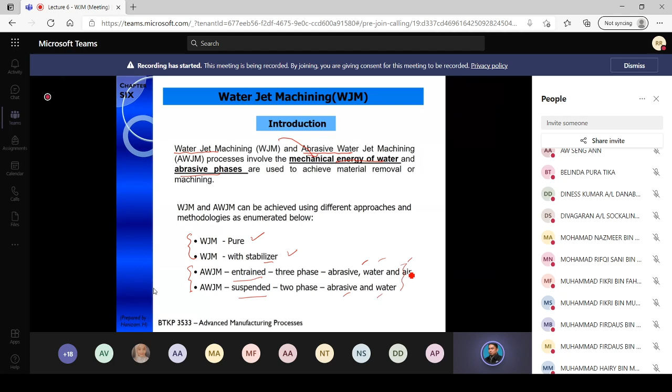Okay, water is pumped at sufficiently high pressure, 200 to 400 megapascal, to produce how much pressure? You pump the water using this 200 to 400 MPa, megapascal, to produce how much pressure of water? Yeah, 1000 bar? 4000 bar. 2 to 4000. Yeah. No, this megapascal converted to bar, 200 is 2000 bar.

So this one is the pumping water, the pressure of the pump. So the water is pumped up to how many psi? 50 to 200 kpsi. Okay, this is the pressure of water. This is the pressure of the pump. Right. So next is the intensifier.

It works on a simple principle of pressure amplification using hydraulic cylinders of different cross sections, meaning from bigger diameter to smaller diameter to much smaller diameter. Okay, water at this pressure, let's say P. When it arrives here, the pressure doubles, 2P. At the narrow one, maybe 3P. Meaning that as the cross section of the cylinder gets smaller, the pressure gets higher.

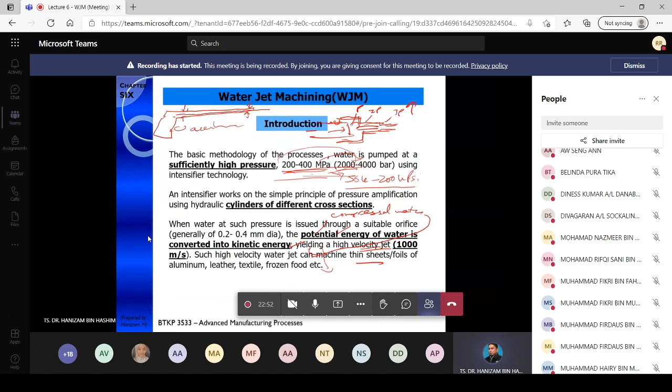Yang abrasive tu, abrasive what? Contoh, there are water jets for machining and there are those used for cleaning also, right? Like high pressure cleaning, car wash and all that, right? So what's the difference? Is it abrasive slower or what? Oh, the pressure is actually low.

Okay, example this one. Can you see this one? Car wash. Water pressure to wash a car. So the PSI is only about 1300 to 1800 PSI only. Just different names for each type of water? Okay, not different names. Actually different pressure. Use different pressure for different purposes. For example, this range of water pressure is for cleaning. This range of pressure, 50,000 to 200,000 psi, is for machining.

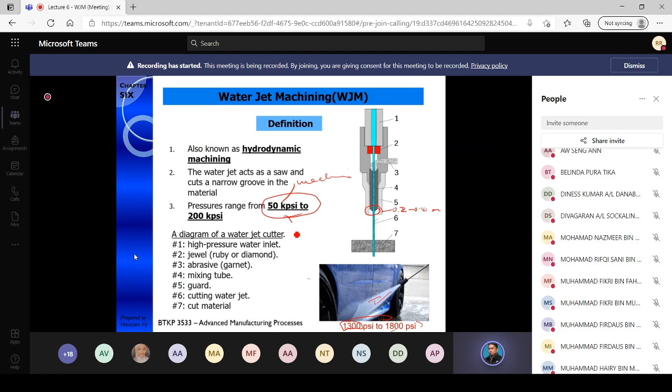Let's say there's another one for, how we call it, I forgot the word. Let's say you want to remove paint, right? You want to remove all this paint from the car body. You can add abrasive also, maybe walnuts, into the water pressure, so that you can add another force instead of just water. Sandblasting? You can also have sand, or you can also have walnut skin.

Sandblasting is slightly different. Sandblasting only involves sand and air. Okay, pasir dan angin saja. But you can still have water sandblasting when you add water. You can remove all the paint from the car body. So instead of 1800, maybe this one goes to 5000 psi. So the pressure of water will determine what type of machining process.

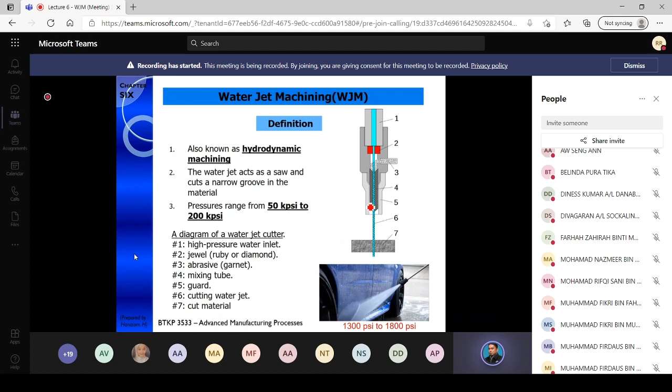Okay, Raja. Yeah. You got it? Okay. Faham. Ada lagi yang lain? Anyone who wants to ask? You can always ask me in Malay, no problem. Okay, if no question, then we proceed lah.

Next one, in pure water jet machining or WJM, commercially pure water is used for the machining process. Only water, tap water or pure water. However, when the high velocity water jet is discharged from the orifice or nozzle, it tends to flare out because of atmospheric pressure. For example, this is the nozzle. When the water comes out, because of the air between your workpiece and the nozzle, there's some resistance from the water to the workpiece.

Flaring out means they tend to kembang, to break up, like your spray. So to solve this problem, people normally add stabilizer. Stabilizer is a fluid containing polymer material. This so-called long chain polymer holds the water straight, not flaring out. When it is straight, you can maintain the pressure of water. So it involves only water, but to maintain the water pressure, you can add stabilizer made of long chain polymer. Okay, this is water jet.

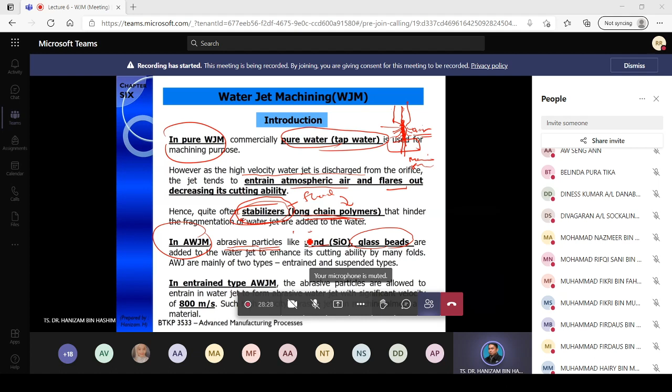There are two types of abrasive water jet. The first we call entrained, the other is suspended type. Entrained means that you add the abrasive particles and the water together before it shoots out from the nozzle. The speed of water can go up to 800 meters per second.

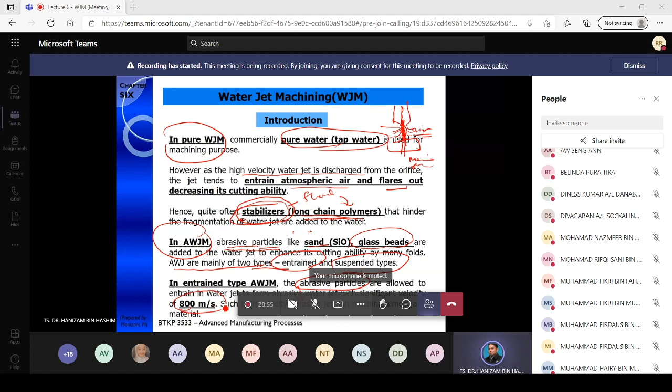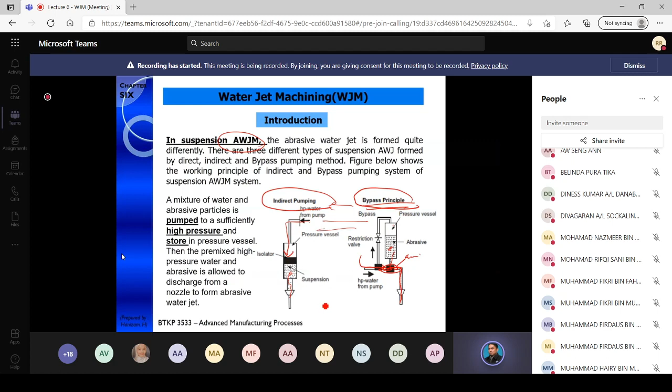These two I think is not important lah, is almost similar. The concept, the mechanism is slightly different, but the output, the outcome is very similar, it's the same.

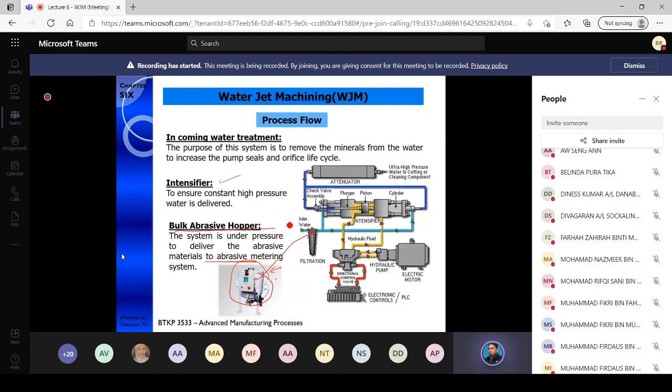Okay, next, I think this one no need to. You can read on your own what is attenuator, abrasive metering system. This is metering system, right? Because it's transparent, you can look at how much abrasive material we have during the cutting process. If insufficient, you can add into the hopper.

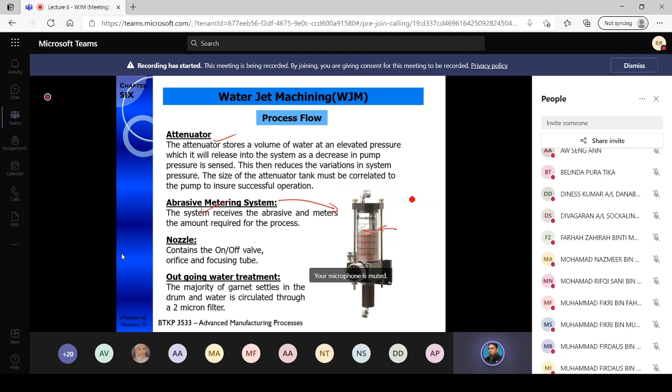Okay, process capability: you can use it to cut any material up to 1 foot, 12 inch. Very thick material. Can start cutting at any location without pre-drill hole. Let's say you have this plate, right? You want to cut a hole. If you use EDM wire cut, you cannot straight away put your wire through. You have to make a hole first, then you can insert your wire, then you do cutting.

But water jet machining, you don't have to drill any hole at any location. You can machine at any place that you want. It's similar to laser jet lah. You can put your nozzle here, start the machining process, straight away cutting. No need the pre-drill hole. No heat produced because of the water. Water is actually automatically cooling the working area.

And no flex to the material being cut, therefore suitable for flexible material. Because there's no contact between the nozzle and the workpiece, it will not flex the material.

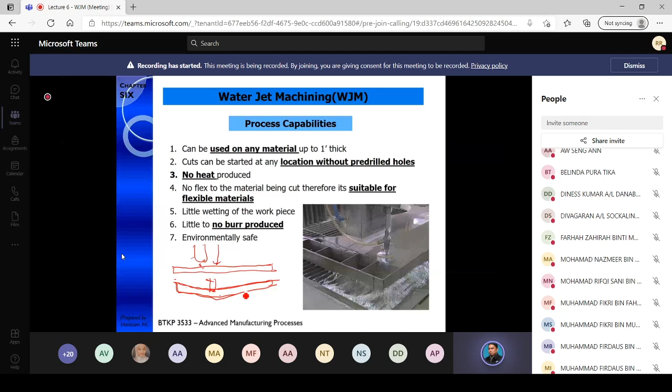Okay, little wetting of the workpiece. No burr produced. Environmentally safe. Burr means that at the cutting end, there's no burr here. I think actually there's burr, but it's very minimal.

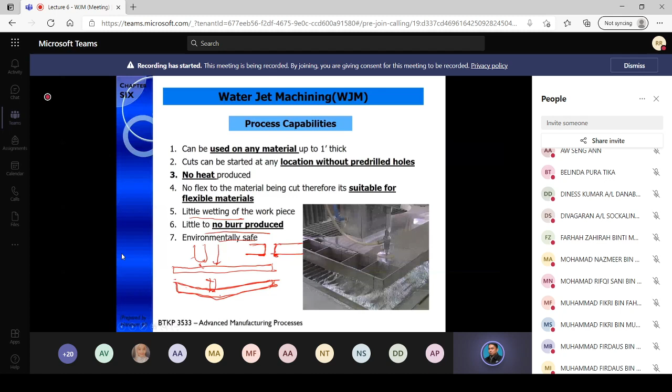Okay, next it goes to the application. For water jet only, you can cut food product, paper industry, fiberglass, automotive. You can cut carpet, door panels, and so on. Let's say you want to put abrasive, also no problem, you can use abrasive water jet. But for food product, we don't allow abrasive, because it will contaminate the food.

Okay, for abrasive water jet machining, you can cut harder material for hard application. You can cut metal, steel, titanium, ceramic, composite, glass, concrete, and so on. Rubber actually you can cut by only water jet, no need abrasive water jet. But this one you cannot use water jet only because it's not strong enough to cut all this material. Right, then talk about abrasive.

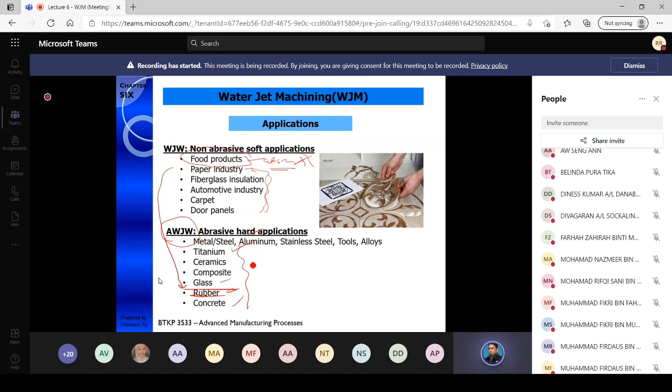It depends on the mesh number, from 36 to 150. When we talk about mesh, again I remind you, the smaller the number, the bigger the abrasive size. 36 means the number of grit is 36 per square inch. So the grit size is bigger compared to 150, which means per square inch there will be 150 holes. Like tapis lah. So the abrasive size is smaller. 80 is quite common.

80 mesh. Okay, all this sand normally can be found in Africa, Brazil, Canada, India, Sri Lanka, Madagascar, and USA. So far we cannot find this sand in Malaysia. We cannot use the sand in Terengganu beach even though it is very small, very fine, right? That is not fine enough.

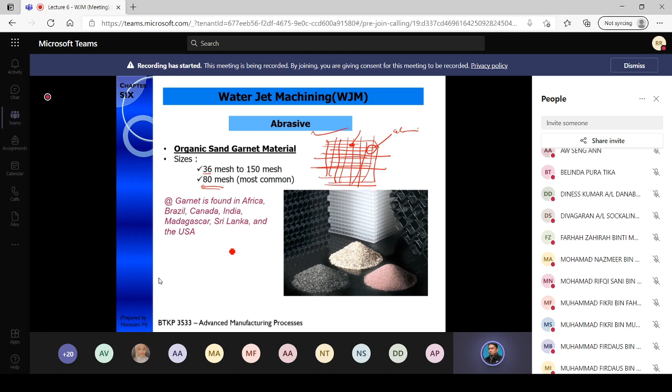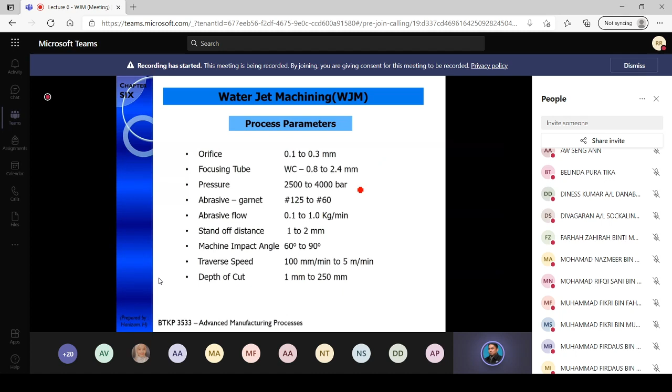Okay, process parameters. These are all the process parameters you can control to optimize the water jet machining process. And MRR, material removal rate, is directly proportional to the water pressure. Or to calculate, MRR equals HT, W, and V. What is HT? It is depth of penetration, W is width of kerf, right? Then V is traverse speed.

Traverse speed means, let's say you want to cut this square, traverse speed means how fast the nozzle is moving. Okay, the speed of the nozzle. Depth of penetration means the thickness of the workpiece. Okay, this one, HT.

Width of kerf, top and bottom. This is kerf. Kerf means the path or the gap from cutting the workpiece. Okay, this is top and this is bottom. This is top diameter D1, and this bottom one we call D2. So to get the average, D1 plus D2 divided by 2. Okay, very simple, the MRR calculation.

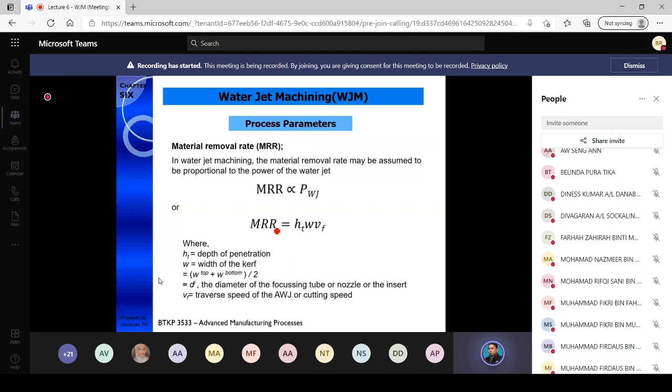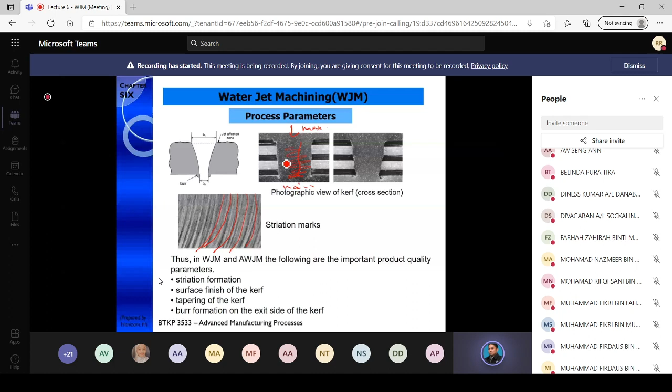As you can see, the striation mark is a shape like this, an up shape, because the pressure from top to bottom is dropping. At the top, the pressure is maximum. When it goes to the bottom, it drops to minimum pressure because of the resistance of the material. But even though the pressure is dropping, the leftover pressure is still very high. That's why we use a water tank to catch or reduce the pressure of the water. I think you have to watch the video to understand more on the process.

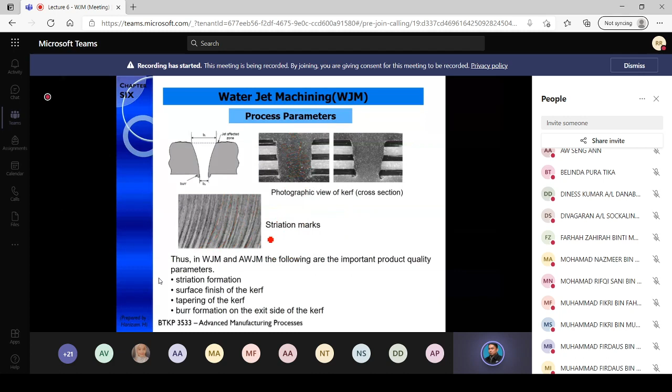Okay, cost. As an engineer, cost calculation is very important. You have to know the cost of your process. For example, for water jet machining, the estimated cost is about $17 to $22 per hour, which includes the utilities: normally electricity, water, or rental if you have. Then maintenance cost: the seal, booster, pump filter, and other miscellaneous. These are all the criteria you have to factor in when you calculate the cost. Consumables: orifice, focusing tube, garnet, and so on.

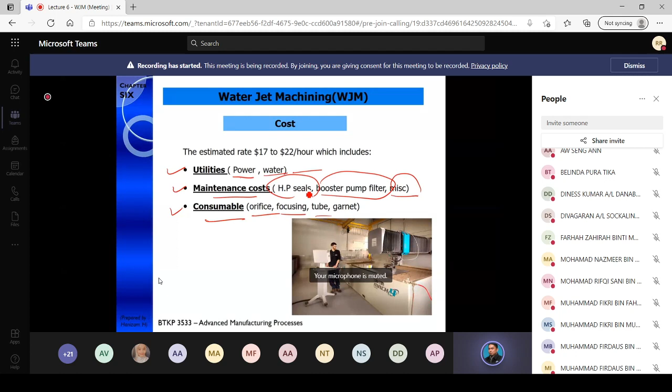And this is how they calculate the machining cost. For example, orifice, the price is $14 to $20, and it can last for 40 hours. So it's about 50 cents per hour. For nozzle, one nozzle costs you about $85 and can last about 80 hours, so 1 hour costs you about $1. So all these fractional costs you have to factor into the actual cost when you do machining.

Then you have to insert the operator cost per hour, maybe $20 per hour. Capital monthly payment: let's say you loan the machine, so you have to pay maybe 10,000 per month, and you have to convert that into hours. Normally when a customer comes to you as an engineer, he will ask you to give a quotation. Based on this calculation, you can give the quotation straight away to your customer.

But normally you have to mark up a bit because this does not include the machine efficiency. For example, if your machine efficiency is about 80%, you have to times 1.2. Or to play safe, maybe you can times 1.5, or times 2 of the actual cost to get a profit.

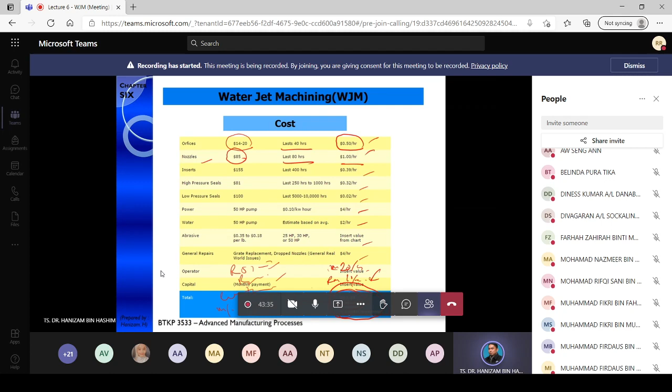But do you have to change the nozzle, or is it every time? Change nozzle, okay. Not nozzle lah, I mean like every part also has to change because they don't last long, is it? Yes, yes. 40 hours, 40 hours is like what, 2 days? Okay, when we talk about 40 hours, don't misinterpret. 40 hours means 40 hours of machining process.

Yeah, I understand that. But then machining process means that if you run the machine without stopping for 40 hours, then you have to change this thing, all the orifice, nozzle. Let's say, cepat haus lah. Of course, this one lasts 40 hours, normally given by the supplier lah. Let's say it lasts 40 hours, the price will be equivalent to 40 hours punya harga lah, because you say this one is $14 to $20, right? So it's quite cheap.

But all this price, all this cost, you can claim to the customer later on. You will include it into the customer quotation. So 40 hours is not talking about this, it's talking about machining time. Let's say one day, right? You do water jet only for 2 hours per day. So 40 hours can last about how many days? 20 days, right?

So all these so-called regular parts have to be replaced. As an engineer, you have to keep stock lah. Nozzle, right? It can last 80 hours. For example, orifice, you have to keep stock so that it will not stop the machining process. Okay, good question. Ada lagi soalan? Any more questions? Any question?

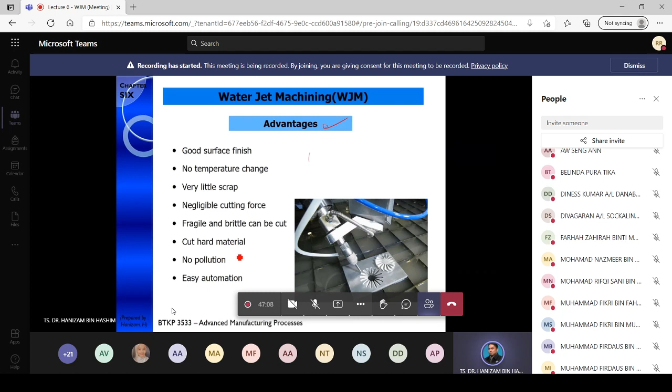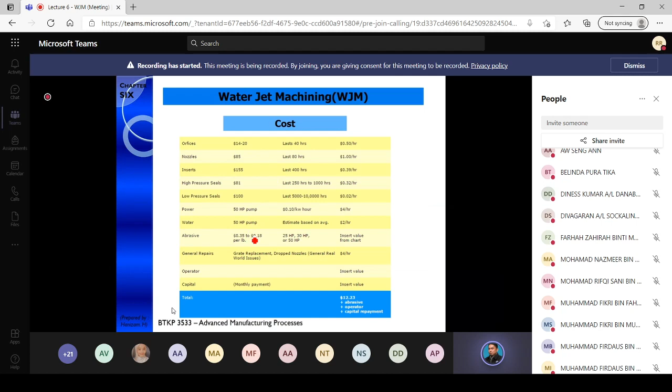Okay, disadvantage, right? The hourly rate is high. Okay, but this is also relative to the type of project that you do lah. If your project is a high-end project, right, maybe it's worth it to do water jet machining. Otherwise, you can use the other non-conventional machining processes lah. It's cheaper, because the hourly rate is high, contributed by all the costs we mentioned just now, and also the capital cost, the first investment of the machine. Right, the machine may cost about 500,000 per machine, depending on the spec that you want to have.

Other disadvantage, not suitable for mass production. Right, please remember, it's not for mass production. That's why the orifice can last only 40 hours. So normally for small projects only you cut by using water jet machining. If you use it for mass production, maybe like what Raja said, every 2 days we have to change the orifice. This orifice changing we call setup cost. This one you also have to factor in when you calculate the cost.

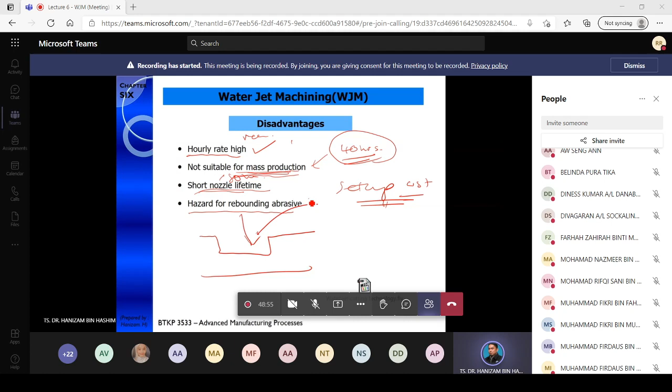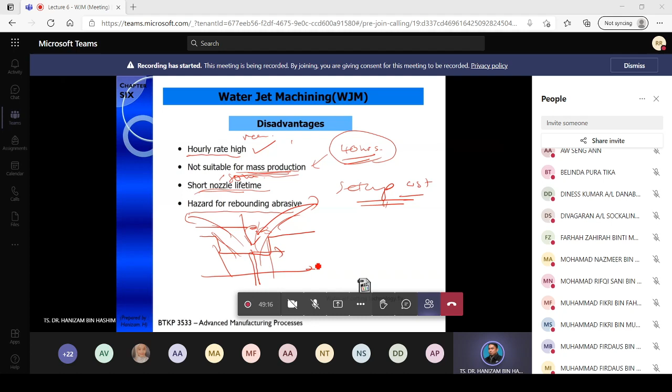Alright. Short nozzle lifetime. Nozzle about 40 hours only. Right. Hazard for rebounding abrasive. Let's say the material is very hard, right? Normally during initial cutting, all the abrasive will bounce back, okay, until you can pass through the material. Then only you can cut the side. So you cannot sit near the machine area. You have to stay very far, or you have to put some guard to protect yourself.

Okay, technology comparison. Actually, you haven't covered laser yet, but you can compare EDM and water jet. Right? In terms of advantages, right? Material thickness, cuts all metals, no HAZ. Okay, these are the most important advantages compared to EDM.

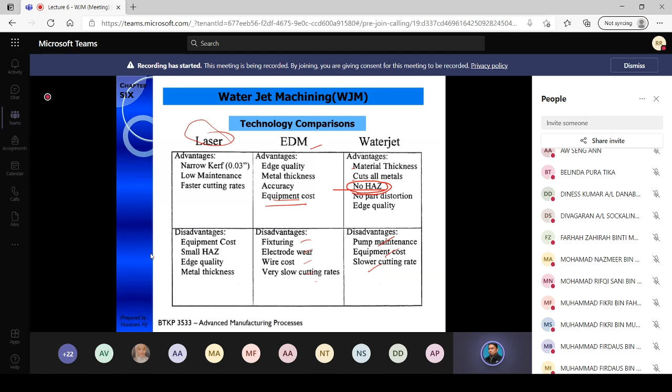Environmental issue. Actually, there's not much environmental issue for water jet machining, except for water recycling. You have to recycle the water. Actually, all the machines are doing the recycling. Okay, spent water disposal, chip recovery, abrasive recovery. All this abrasive material you can recover, you can use back, you can collect from the catch tank.

When you talk about catch tank, it's actually the tank. You put your workpiece here, right? This is your water jet cutting, right? All the abrasive material will fall into what we call the catch tank. Catch tank, tangki menangkap. This one is all water. So it will catch all the abrasive material and deposit it at the bottom of the tank. So later on, maybe you can dry off the tank and reclaim all this abrasive material, re-dry and reuse.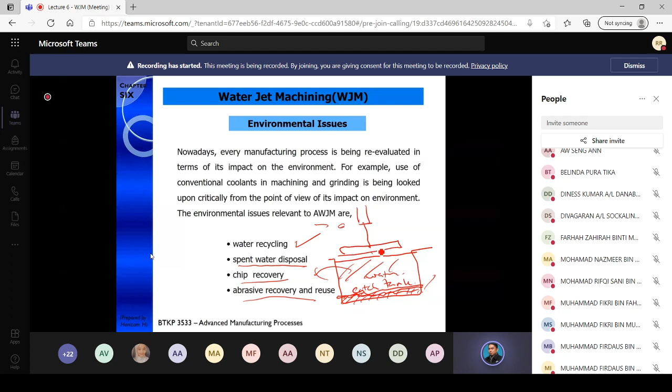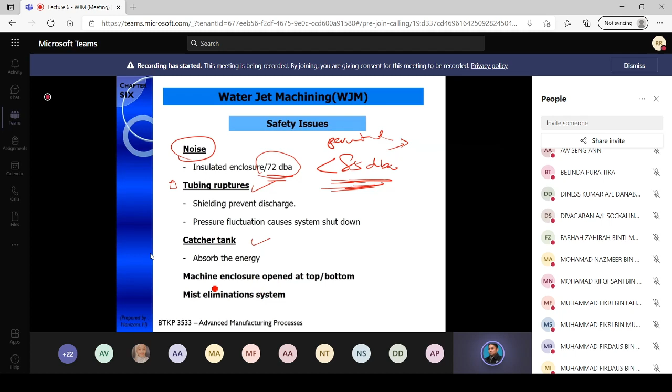Tube rupture, right? Because of high pressure, the potential of tube rupture is quite high. So you have to stay away from the working area, or you can wear all the PPE like your goggles and so on and so forth. Catcher tank, absorb energy. Okay, maybe machine enclosed, open at top. Or maybe you can put some guard or whatever.

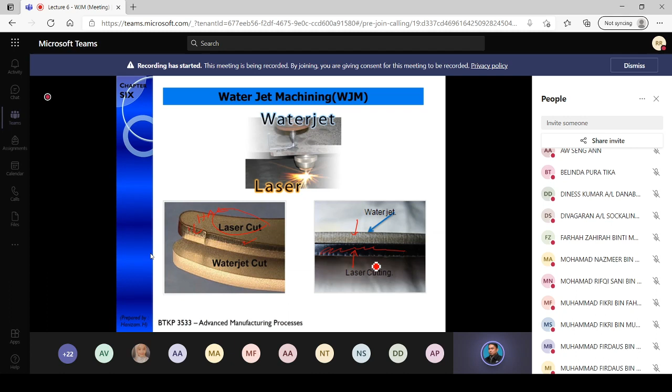Then water jet, comparison between laser and water jet. Like laser cut, you can see all this dark area is actually caused by HAZ, caused by heating. It's a burn mark. Okay, here also you can see water jet is very clean. Okay, for laser cut it's quite dark. This one is a burn mark and has an HAZ problem. Okay, some of the samples.

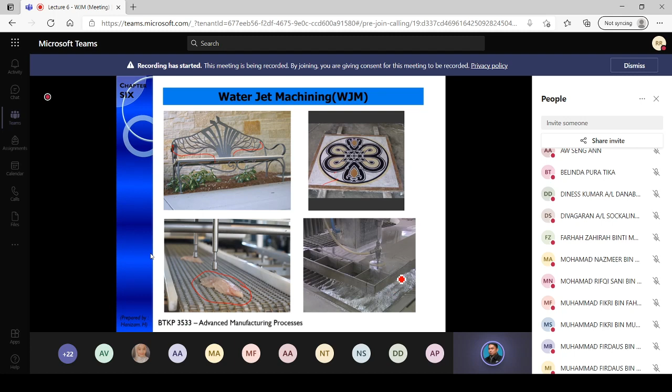Okay, for example, this one you cut meat, chicken. You can cut using water jet. You can cut all these panels, right, from aluminium, ceramic, or this block. Okay, mosaic block. Okay, you can cut gears. Okay, again this one is stone, right, or aluminium sheet.

Okay, this one is actually some 3D application. It's the latest technology, because you can actually tilt the nozzle angle instead of just straight cutting. You can tilt, right, so that you can cut some so-called 3D workpiece.

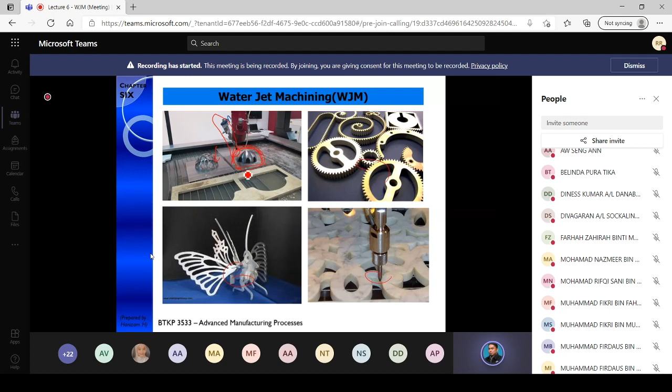Okay, ada soalan? Any question? Okay, are you sure? Are you sure you are okay? Yang okay lagi.

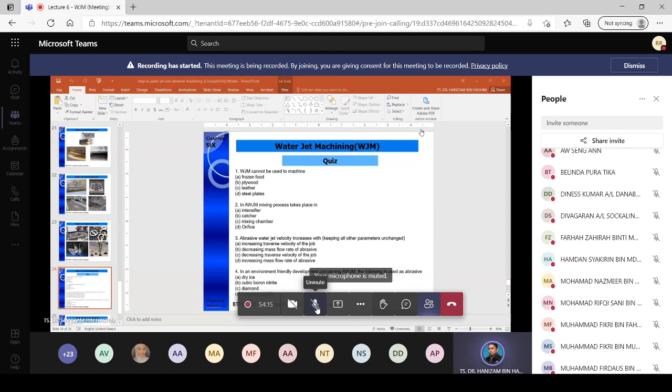Okay, I ambil attendance sekarang because only 35. I don't want to wait anymore because I'm afraid the 35 pun akan kurang. Okay, so now we go to quiz. Please, I ask your name, please answer.